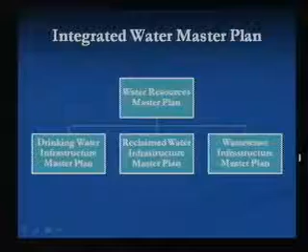Right now the city has a structure based on wastewater pipes, generally thought of as the green pipes or sewer pipes. We have the reclaimed water lines, thought of as non-potable or purple pipes. And we have the drinking water lines, the blue lines, which come to your house and serve direct potable water. You'll see this graphic a little later as we move through the presentation.

The big question of why do we need this plan? Well, why we need it is it's a planning document.

Just like the city has the strategic plan and the general plan, our Water Resources Master Plan and our infrastructure master plans are based on those plans. At the very top is the strategic plan - where does the city want to go strategically? Below that is our general plan.

What we take from the general plan in Water Services, we really focus on two major components: land use planning - the densities, where commercial is, the number of homes, high density, low density, rural residential - and we also take the landscape plan to build our Water Resources Master Plan. What kind of landscape do we want to see as we move through the city and as we grow out to build out?

Then whenever plans for new development are submitted to the Planning and Zoning Commission, those plans are used to come up with development master plans. For example, Sierra Montana might come into the city. When they submit their PADs and all their planning documents, we also require them to submit a development master plan. That development master plan is specific to Sierra Montana, but it's based on the guidelines and direction we've identified in the Water Resources Master Plan and the Infrastructure Master Plan.

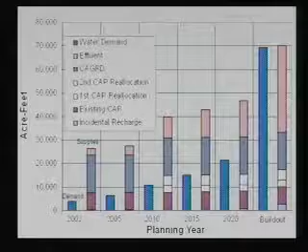So this would be someone like a turf facility, a large school, or commercial users who can use the water directly either in their commercial application or on their landscape out in their commercial parcel. The difficulty with this, of course, is we have to figure out how much of our potable demand can be met with our potable supplies.

So that's one of the things we're doing as the update to this next Integrated Water Master Plan—figuring out, is that potable demand, let's just say 30,000 acre-feet a year, less than or greater than our potable supplies? Because if our potable supplies are less than that, we're going to have to convert this non-potable supply into a potable supply, and we would do that through recharge.

We'll talk a little bit about that later on. Could I ask—you show more non-potable than potable water, where are we importing? Actually, what happens is our water service area is actually smaller than our sewer service area, so we don't currently serve all the demands within the city's planning area.

For example, we have 12 different water providers within the Surprise planning area. The major ones are the City of Surprise, Arizona American Water, El Mirage, and Beardsley Water Company, and then there's a lot of smaller water companies. So we actually get effluent from those customers because they are sewer customers but not our water customers, and that's what makes up a lot of this large pink salmon color supply.

Do these other companies then also have allotments from CAP and all that, or? Currently, the only water providers that have a CAP allotment are the City of Surprise, El Mirage, Arizona American, and then there's 2 other small private water companies. All the other water companies are actually using groundwater to meet their demands.

So we talked earlier that there were kind of these 2 layers. There's the Water Resources Master Plan, which is our strategy for meeting our supplies. It also talks about our demands and our supplies, and further on we'll talk a little bit about the infrastructure. One of the goals in the Water Resources Plan is to make sure that we can meet the needs of today and the future as we build out.

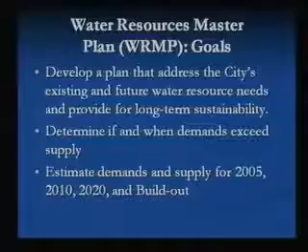The other thing we need to do is figure out if and when demands will be greater than supplies, because we want to know when that happens so we can plan for it. There are things we can do to plan for that—we can change the demand calculations, reduce allocations, change the landscape allocations, change densities. We can change a lot of things.

The other thing we can do is go out and buy more supplies. The difficulty is that as the valley grows, there are fewer and fewer supplies available to purchase. The city just recently went through a reallocation for CAP water, Central Arizona Project water, and got about another 2,800 acre-feet a year, so right now we're at about 10,000 acre-feet a year. The difficulty is that there's not a lot of water to be had on the open market.

So it does become a resource that is limited as we continue to grow, and as the valley does. Can I ask a question about that?

Sure. What we're saying is you have a contract for the water. Is it a long-term contract? It is. Our CAP contracts are generally thought of as long-term, in perpetuity contracts. The reality is, though, they are renewable every 20 years. However, the reason I say they're long-term is because the federal government and the state of Arizona are probably not going to take our CAP water and give it to somebody else. So from that standpoint, all of the cities in the valley tend to plan as that's their supply. They've paid for it, they're going to use it, they're going to have it for long-term supplies.

Now, there is a supply that's available, the Indian waters. Indian CAP water is a supply that some communities are planning on getting in the short term. So they're trying to use some of those waters to meet short-term needs, but the Indian CAP water is thought to be not available for long-term supplies.

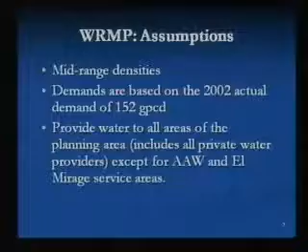So what you would see in that demand chart we showed earlier is supplies stay the same, but demands go down. So we would have a greater cushion at build-out, which again could be used for almost anything we wanted to use it for, either changing densities, going to higher densities, or redevelopment. That water would be available for those options.

We've basically planned for the mid-range densities. So if this really comes in at 3 dwelling units per acre or 2 dwelling units per acre, it's going to affect our demand and our supplies. We should see our effluent supplies go up, because the more houses you have per acre, the more effluent you're going to get. But at the same time, our demands are also going to go up.

Generically, the interior demand for homes is fairly stable - it's about half of the demand we send to the house, so half is used outside. So when we send a gallon of water to your home, generally we get back a half gallon. So for every new home that comes in, it actually consumes more water than we get back from them.

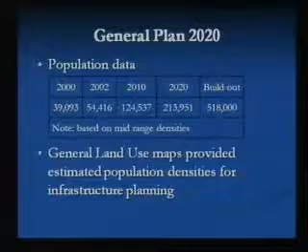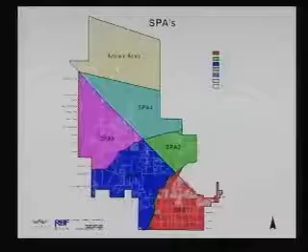Some of the conclusions we made coming out of the Water Resources Master Plan is, as you saw, our supplies did exceed our projected demands. This is based on the assumptions: hitting the mid-range densities, the landscapes, and us being creatures of habit using the same amount of water all the time. The big issue we had to resolve in the next update is that 50% of our supplies come through effluent, so how are we going to use that water directly? We'll talk about that briefly.

So we've talked about the Water Resources Master Plan up here. We've defined our strategies of how we want to use our water, how much we have. So now we're coming into the infrastructure plans.

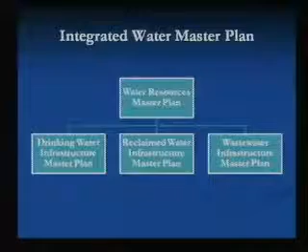The goal really is to define that infrastructure for the build out of the system. So what do we want that infrastructure to look like? How many sewer plants, and where do we want those sewer plants generally located? How many wells, how many water supply facilities, how many pressure zones? This gives information to the development community and to the city about how we're going to grow, so that when we get there, we can do that in an orderly fashion.

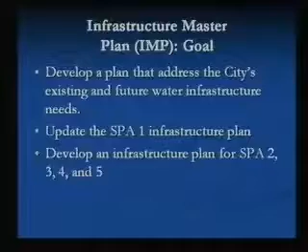From there, we can actually use that water in several different ways. Currently, what we do is put it into recharge basins, and that water filters back through the soil and back into the water table. So again, what we take out, we try to put back in.

This is about a 9-month process. We put water up here today in the basin, and 9 months later it reaches the water table. As it goes through that water table, it gets another treatment process called soil aquifer treatment, where the soil helps treat that water.

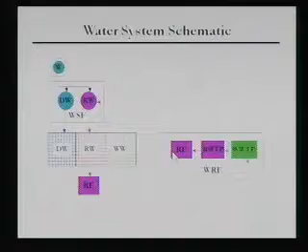This is our drinking water master plan, a very high-level plan showing what the system would look like. Here you see all SPAs 1 through 5, and we treat each SPA as its own water service area. Each of these light blue dots or squares represents water supply facilities, where we have tanks, boosters, wells, and all the infrastructure to bring water to your house.

The lines are the large distribution system, the large lines that bring water through the streets back out to each of the properties. As you can see, we're supplying water to all of those private water companies out here in SPA 3, 5, SPA 4, and 2. This gives us the option to do that, not that we will.

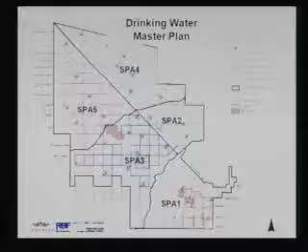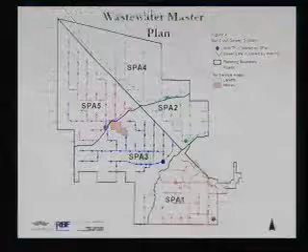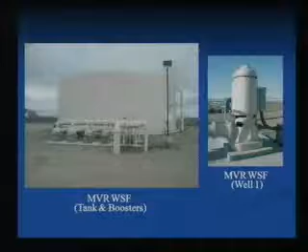You asked about draining those, and how often. We try to do tank maintenance every 3 to 5 years, depending on the quality of water going into the tank, and they're mostly drained in the wintertime when our demands are low. We slowly drain them off over 2 or 3 days into a large retention area. In some cases we don't have to drain into the retention area—if there are multiple tanks, we just draw one down and don't fill it back up. In other cases we don't have that ability, so we have to drain them off to the retention areas.

This is kind of the wastewater infrastructure. Again, looks very similar—you see this whole SPA concept, breaking the sewer into manageable planning areas, so as we move forward we can define that for all of the areas.

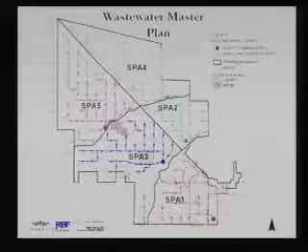In this case we have 5 sewer plants. Right now we're down here in SPA 1. This is the only sewer plant that is currently a regional facility that's operating. This facility and this facility are under design and will be under construction in the next year or so. We do have a temporary facility currently operating here, and eventually that facility will come down to this regional facility in SPA 2.

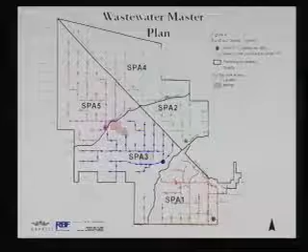The concept is we want to use gravity and stay as cheap as possible, so we don't want a lot of lift stations where we have to collect the sewer, pump it up, and spend more money. This system is also designed so as we move forward, hopefully there's a benefit to the city and to the developer from a standpoint of oversizing. So again, there's that balance between one large sewer plant and 12 smaller plants.

The Reclaim Water Master Plan—we don't serve reclaim water like we do for sewer and water. Currently in this plan, reclaimed water has been limited to these green squares. So if you're, for example, in SPA 1 down here, the only areas that will have available reclaimed for the large turf areas are in these green squares. You can see there's a lot of area out here that doesn't have reclaimed. We try not to send our reclaimed water outside of our water service area because it is a supply of water to us. The other side is that in areas where we are the entire water provider, we just don't have enough reclaimed water to supply to everybody.

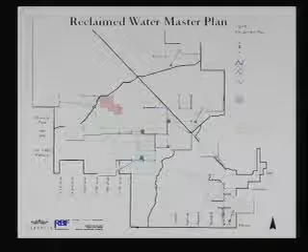This is kind of an example of a sewer plant—this is actually SPA1. There are several features you can see here. Over in this area there's a lot of wastewater treatment process, and over here there's some additional wastewater treatment plant process. This entire site is about 190 acres, and currently this facility is designed for 16.3 MGD. It serves SPA1 only, and as it's master planned, we have an area set aside for an additional 8 MGD, so this facility is almost built out.

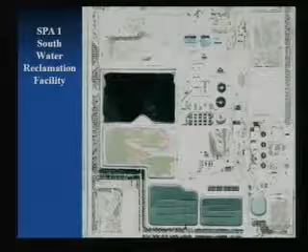The other thing you'll see is the recharge I talked about—these are recharge basins. This facility serves roughly 16.3 MGD capacity, but we're actually operating at about 8 MGD. The recharge basins only have capacity for about 2 million gallons a day. So what we do with our excess reclaimed water is send it off to the HOAs to be used, to commercial sites to be used, and to farmers to be used. We're trying to recharge as much water as we can, but also meet the needs of the reclaimed users.

This is kind of a detail of the recharge and the sewer plant. The thing to take away is that we use a combination of mechanical and biological processes. In this first box, we do a lot of mechanical processing to screen large foreign objects out of the water. Over here, this is actually a biological process—we actually grow bugs that eat all of the solids in the wastewater.

From there, the clean water comes over into this area, and from here the clean water and the solids are separated. The solids go through this treatment process, and eventually we haul them off to the landfill. The landfill takes this and uses it as part of its methane generation. Currently the Northwest landfill isn't generating methane, but with our solids, they'll be generating methane for gas production probably in about 10 to 15 years.

The clean water then comes over and is now called reclaimed water. That reclaimed water goes through an additional filtration process, again a physical process. It's stored and then sent out to the customers.

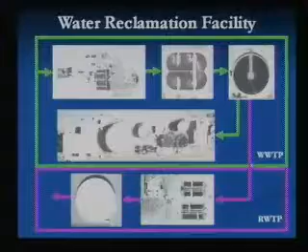So again, if you want to take that tour, we'll be more than happy to take you through the sewer plant, and you can touch and smell and feel everything you want, at your own risk.

The thing we're doing now is updating the Integrated Water Master Plan. One of the things we talked about earlier is remembering SPA 6 is not in the current master plan, so we are going to be adding that to the master plan, or at least evaluating it.

We are also going to be updating the land use model. We've been working with community development to figure out how we want to develop that land use as we move further away from the developed SPA1 area into more of the natural desert areas of SPA 6, trying to create a transition as we move across the SPAs.

We are also looking to expand the reclaim and non-potable system. Remember earlier I showed you those little green boxes where we were going to serve reclaim? The goal now is to evaluate serving non-potable water, so that groundwater that doesn't need to be treated goes to put on grass, combining that with our reclaimed water to supply water out to the entire planning area. So we would have basically a dual distribution system.

So we would have a set of blue pipes going to your house and a set of purple pipes that would go out to the large HOA users. We currently have that now, but the system is limited to the available water we have.

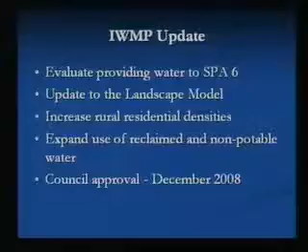The schedule for that right now is to try to hit council sometime in December of 2008 with all of the water resources and the infrastructure master plans. That will be the new basis as we move forward to evaluate anything that would come before you as far as future developments. So with that, I will answer any other questions you might have.

I've had a couple of questions on sort of the gross supply side. One of the questions is, what is the percentage of CAP water versus well water that you're projecting at build-out? At build-out, we'll have roughly about 10,000 acre feet annually of CAP water, but we'll have about 60,000 or 70,000 acre feet of total demand. So we're at about one-seventh CAP water.

Are you basing the supply on current rainfall projections, or some rainfall projections that say the 20th century was very wet and we're going to go back to a lesser rainfall pattern? Yeah, that's something that would affect us on the CAP side. As we start using more of our CAP allocation, if there is a drought on the Colorado River and therefore less available CAP water to the state of Arizona, the state of Arizona has a plan to account for that.

What happens is the farmers take the hit first, so they would actually get reduced in water before the municipal communities would. If the municipal communities got hit, we would then go back and rely on our groundwater during that time of drought.

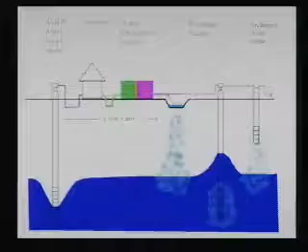The reason I ask is I'm trying to understand your graph of the density or development of the city, and if we go back 15 or so years and move out to build out, it doesn't look like there's a large increase in drinkable water. Is that for a reason?

Yeah, there's not a large increase in drinkable water. A lot of our drinkable water supplies are fixed as of today, so we know what we have available to us today. There aren't a lot of new sources to be had.

That's one of the concerns across the valley for a lot of the water providers, that a lot of the water has actually been allocated to communities. So communities are trying to deal with this issue. As you've seen here, basically the supplies kind of stop at this point.

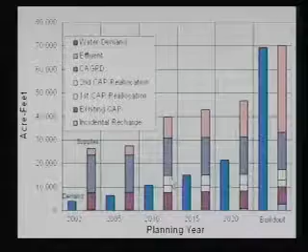And that's because over in here, we actually get some additional CAP water in the future years. So I'm not sure on your graph what part of the demand is drinkable water and what's all the rest.

And that was one of the things we did not do in this analysis, to say how much of the water is potable and how much is our potable demand. We did not do this in the 04 plan, but we are doing that as part of the update to this plan.

So we'll be coming back and saying, of our supply that's drinkable, call it 10,000 acre feet, we have a demand that's 12,000 acre feet, so we would be short 2,000 acre feet. The way we would make that up is by recharging our effluent directly, because once you recharge it, you can now drink it.

I look forward to your updated map. You're looking forward to drinking it? Not the good water.

I have a question. As you put together this new plan, have you tied this back to the general plan 2030 and the whole village concept that is theoretically replacing the SPAs?

Yes, and that's one of the things we're doing now, CD is on our technical committees, so we're actually getting updated information on densities and the landscape. The village component really won't affect supplies much, and it won't affect demands much, because how you concentrate the use within the community is kind of blind to the water resources. It's the same demand still, and the same supply, just concentrated in a village concept rather than an SPA concept.